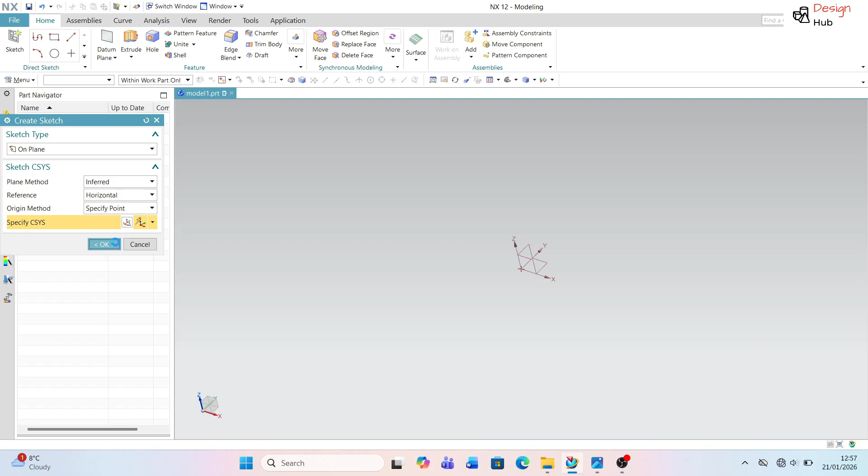So let's start. First of all, select the new drawing, select the sketch, select the top plane. We are going with the line command. Select the line length of 22.5 mm.

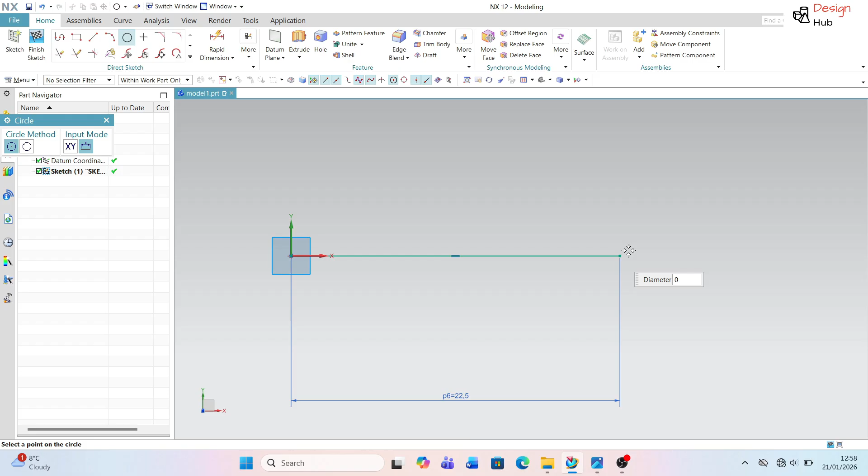The outer circle, the radius is 18 mm, means 36 diameter of circle, the both side.

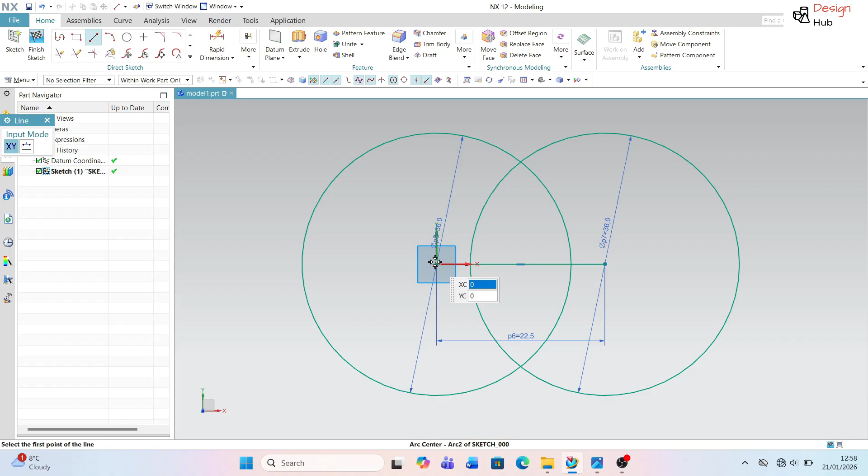Now going with the line command for the reference, the both side and bottom side as well.

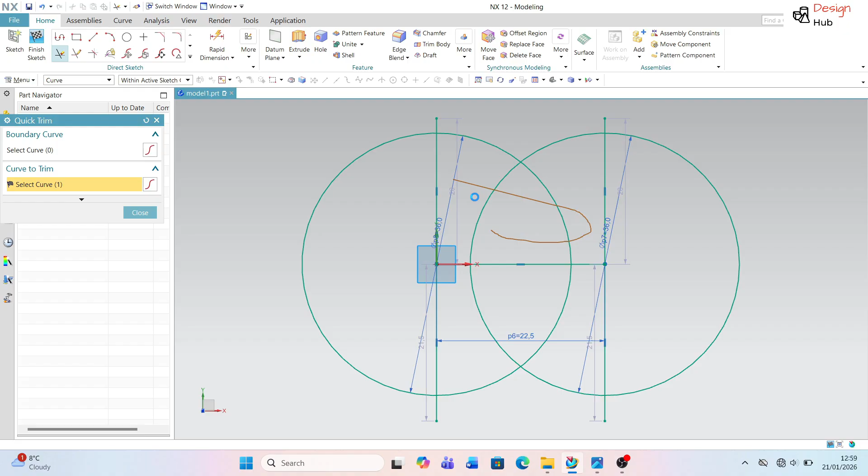Now we are going to trim the unwanted circle and the line.

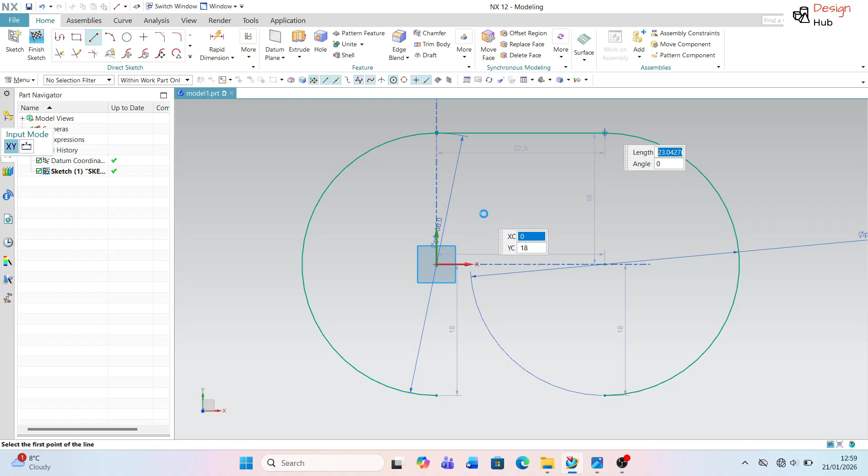Now select the line command and join the two half circle, and our outer sketch of part is ready.

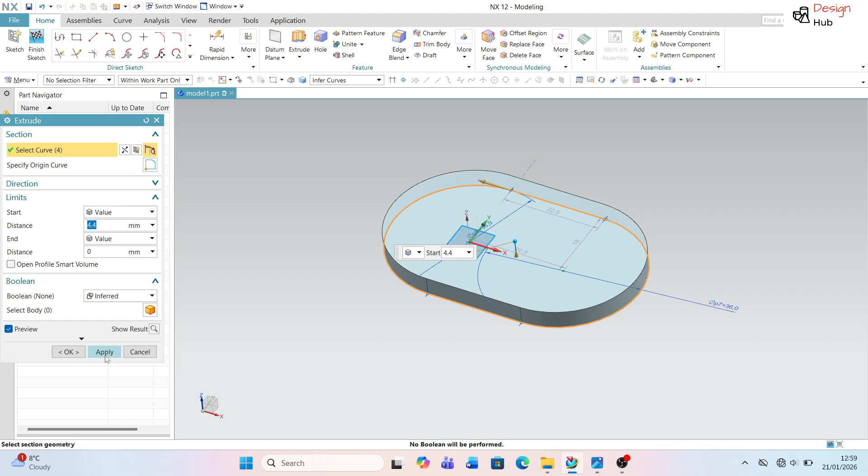Now we are going to extrude this sketch with the distance of 4.4 mm, and you can see the result.

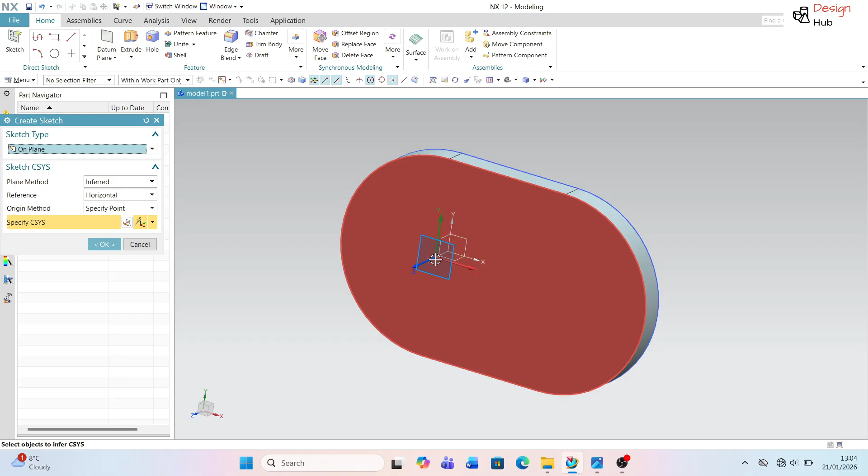Now on the center there is another part, so we are going with the plane command.

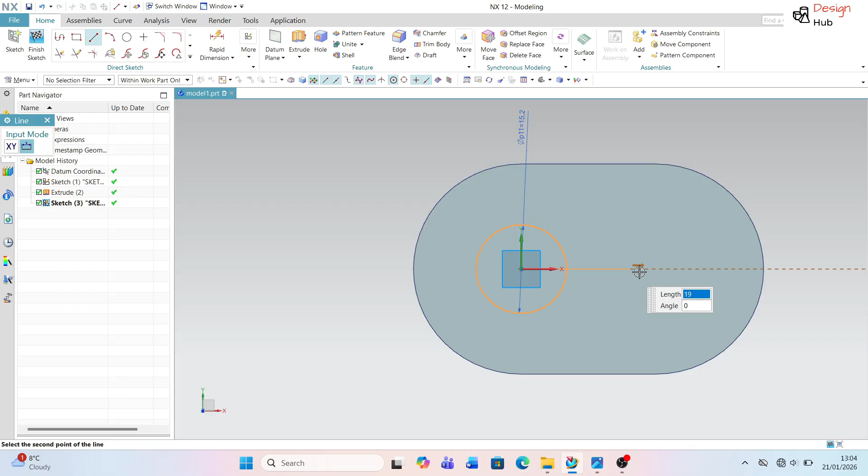Going with circle with the diameter of 7.6 radius, so means 15.2 mm. So both side the circle diameter is 15.2.

Again the same process. Select the circle and inside half circle is radius 5, means 10 mm diameter.

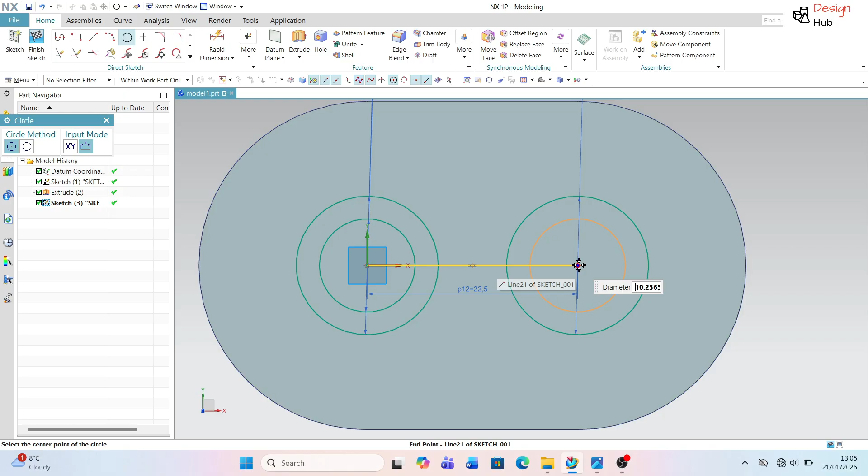Now going with the line command for the reference line, upside and bottom side as well, and the both side. Now going to trim command and cut the unwanted line.

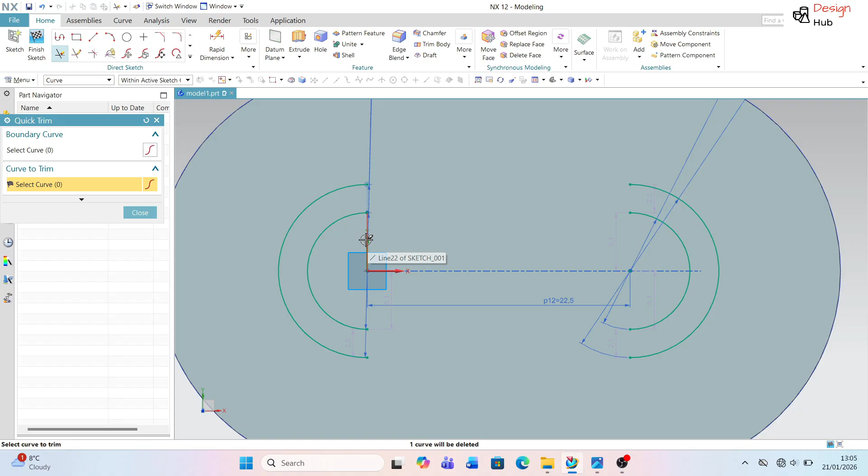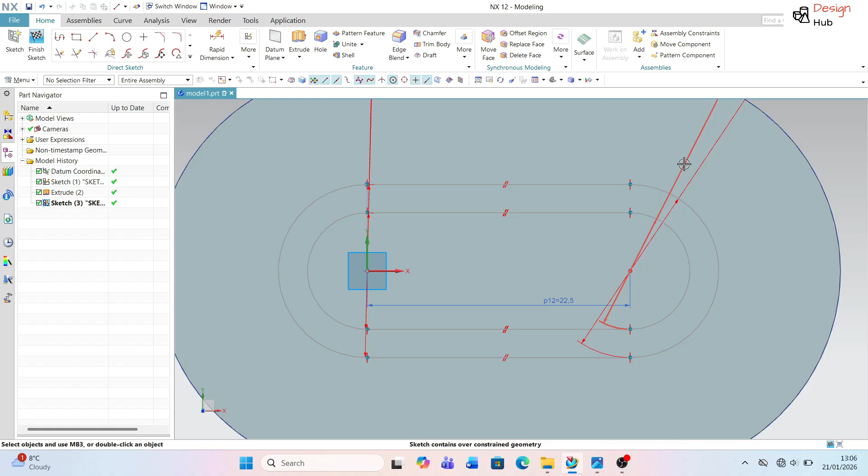Here's a trim ready, so now we are going to line command and connect all the points, delete the relationship. Our sketch is ready.

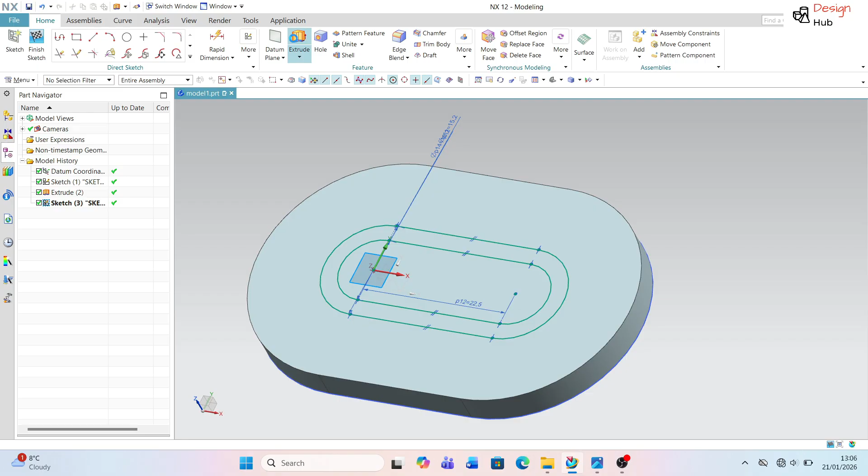So now we are going to extrude, but before we are going to calculate. The total height is 16 mm minus 4.4, so the extrude height is 11.6 mm. Select the extrude and the distance is 11.6 mm.

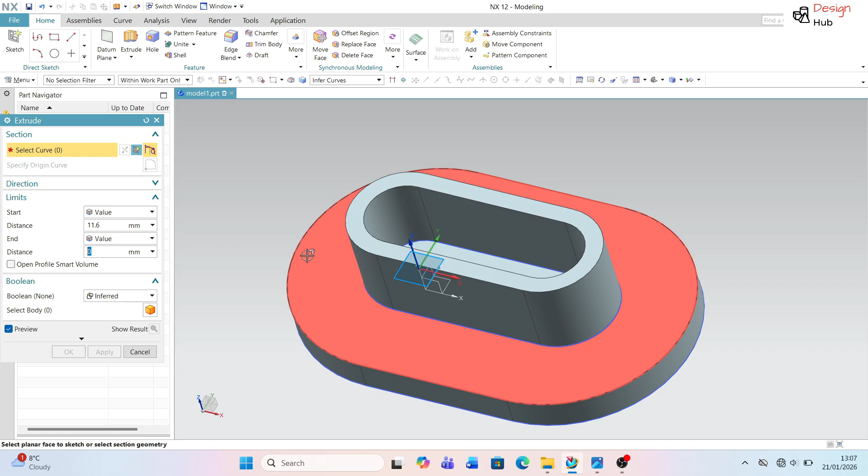And apply. You can see the result is ready. Now there is some center part also need to hide.

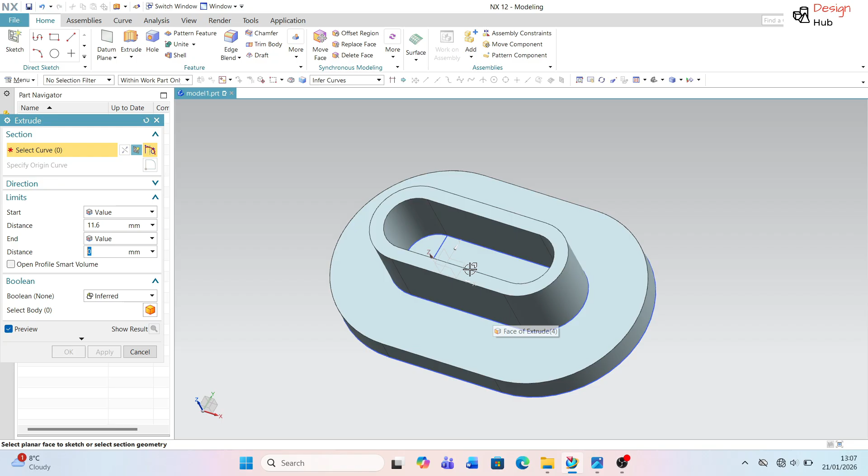So first of all, we are going to calculate some distance, and now going with the sketch command, select the plane, and first of all going with the circle command with the diameter of 10 mm, the both side of same diameter.

Now draw some line for the reference, the vertical line like both side of point, top side and bottom side. Now trim the unwanted line of the inner part of the circle.

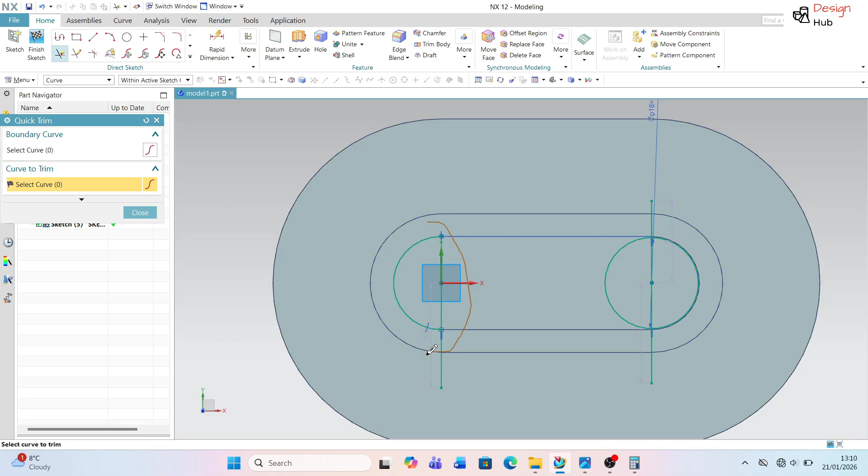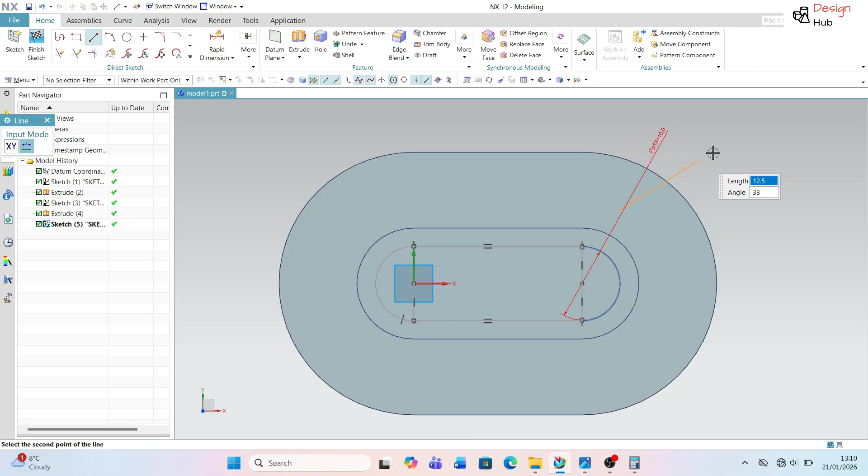Now join the 2 points of circle with the help of line command. Delete the relationship of line with the circle. Now inside part of sketch is ready.

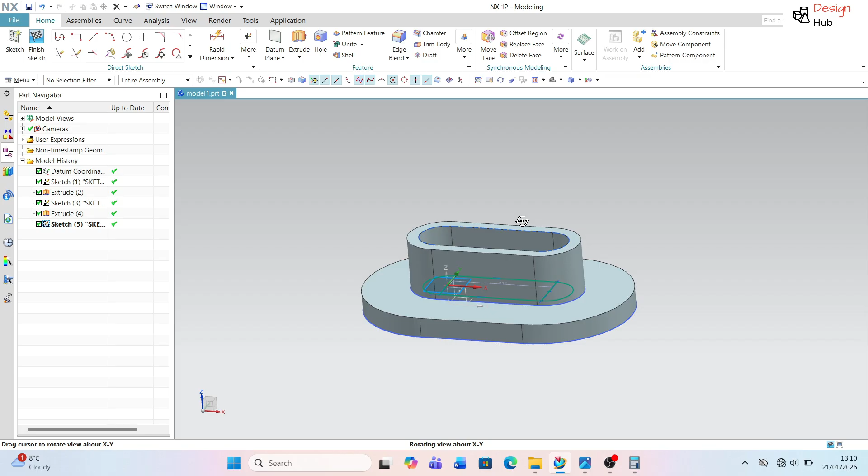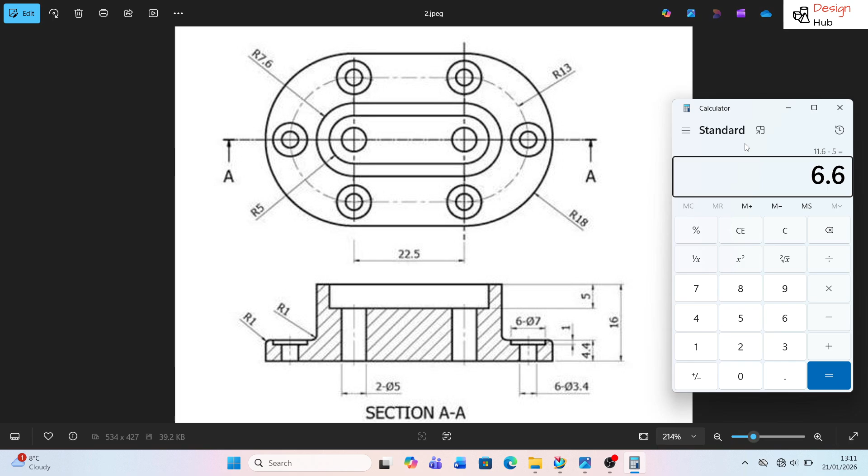Now going to extrude, but before going to calculate the distance. So total is 16 mm and we use 4.4 mm for thickness minus 5 mm from the top side. So now 6.6 mm we need to extrude.

You can see our inside extrude is ready.

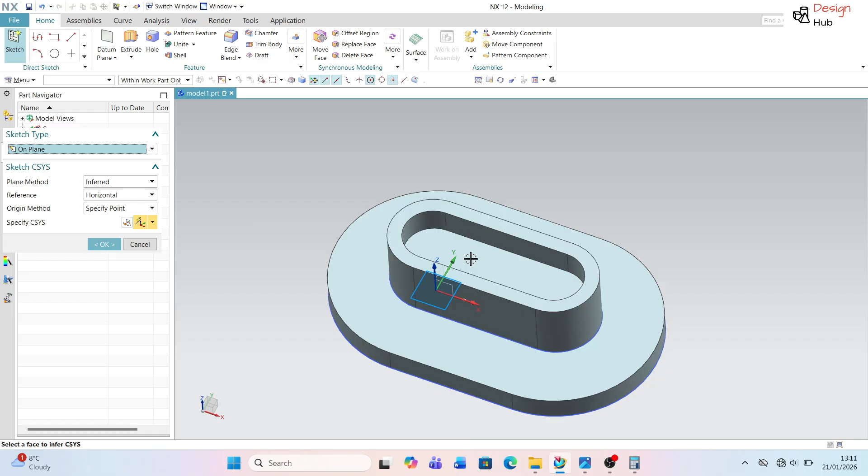Now you can see the drawing, there's 2 holes with the diameter of 5 mm. So going to sketch plane, going the circle command, diameter of 5 mm, the both side.

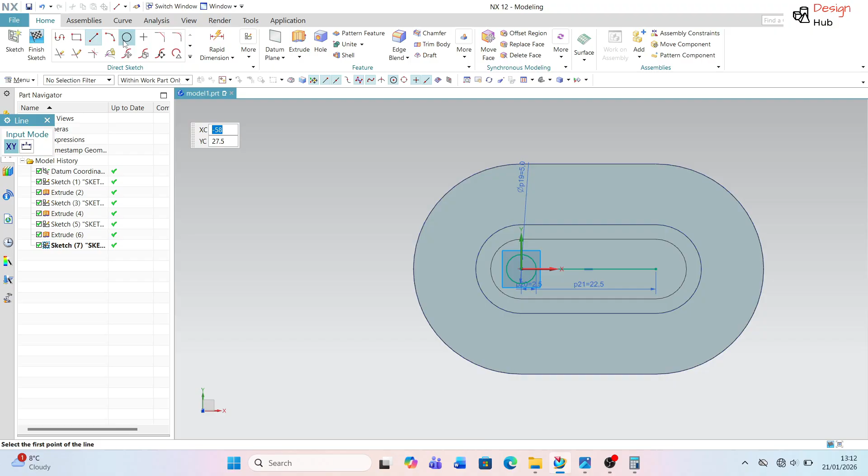The center to center distance are same 22.5 mm. So our 2 holes are ready. So we are going to trim the unwanted line.

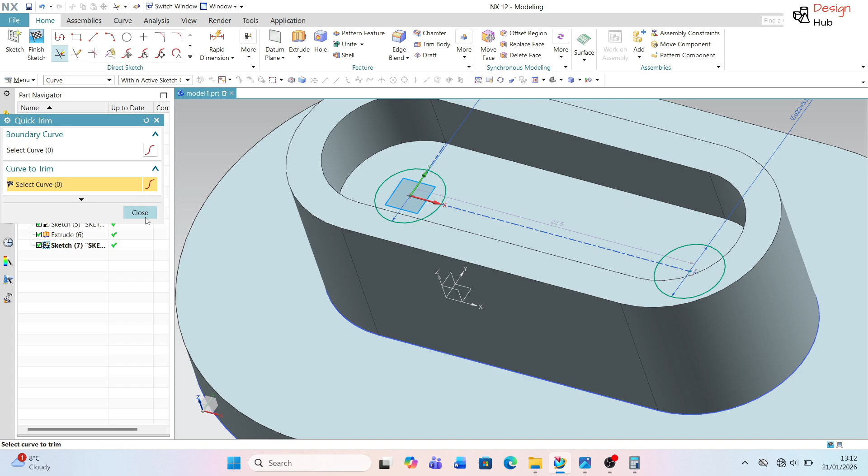Now we are going to subtract the sketch using the extrude command. So you can see our hole is ready.

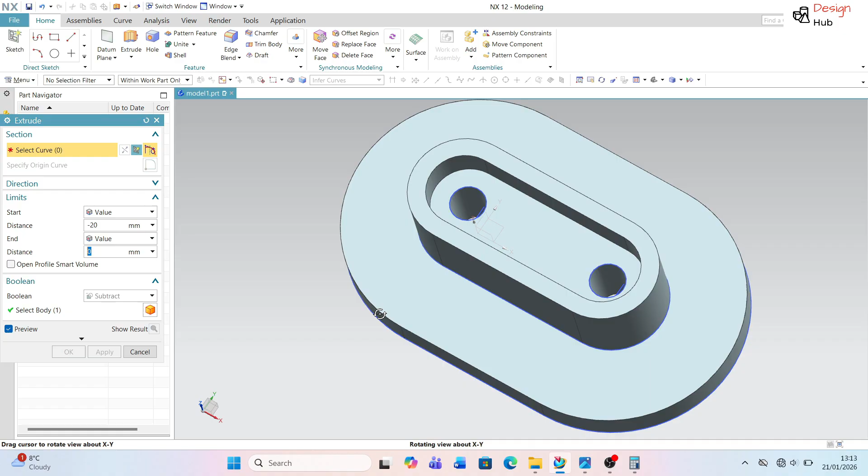Now you can see there is a 6 hole on the face with the diameter of 3.4 mm as per drawing, and the center point.

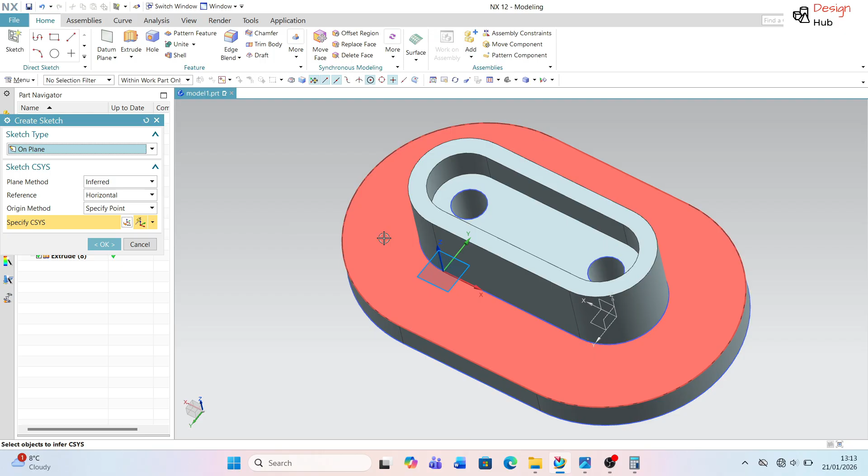So first of all we are going to circle command. The diameter of 26, draw the line the both side, top and bottom. Now trim the unwanted line.

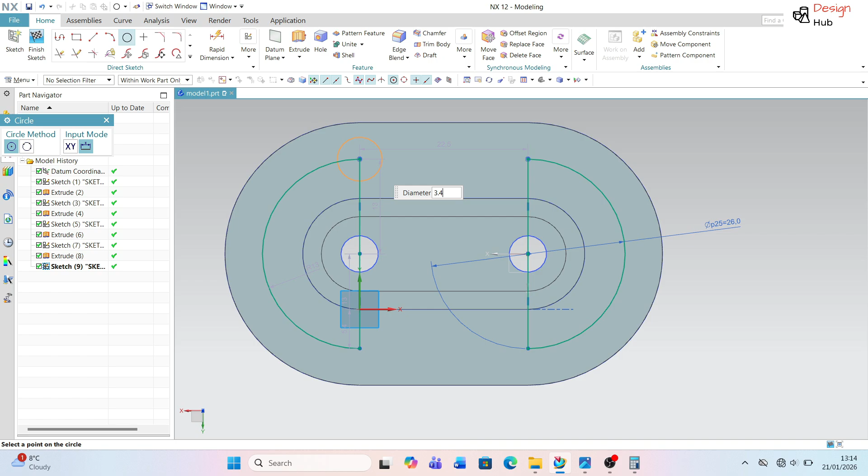Now going to circle command, the hole diameter is 3.4 mm. So you can see our 6 hole sketch is ready. So now trim the unwanted line.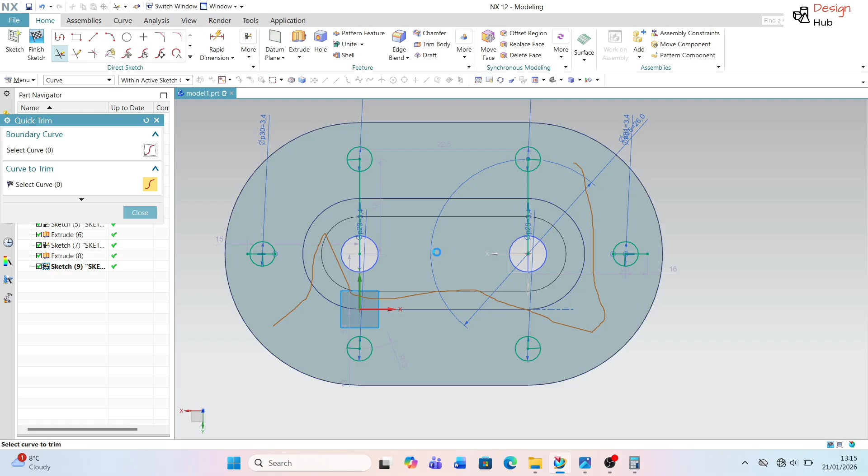Now subtract the sketch, and you can see our holes are ready.

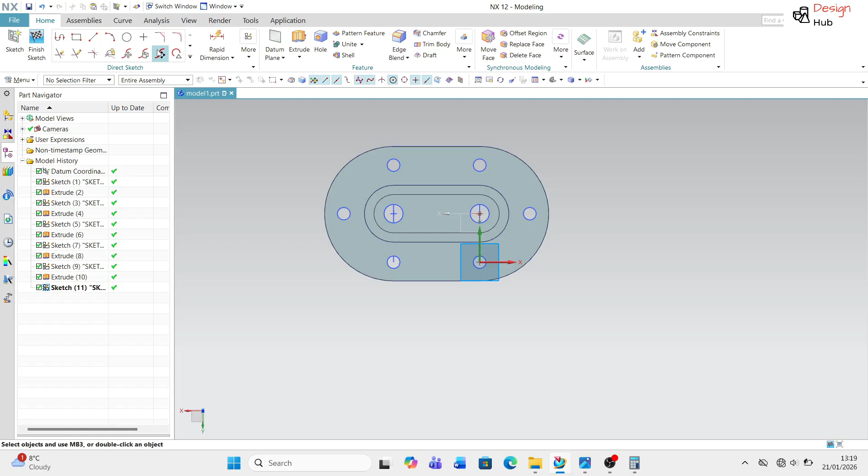Now again the 6 hole with diameter of 7 mm, with depth of 1 mm, is a counter hole. So we are going to same process. The 6 hole we are going to do with the diameter of 7 mm.

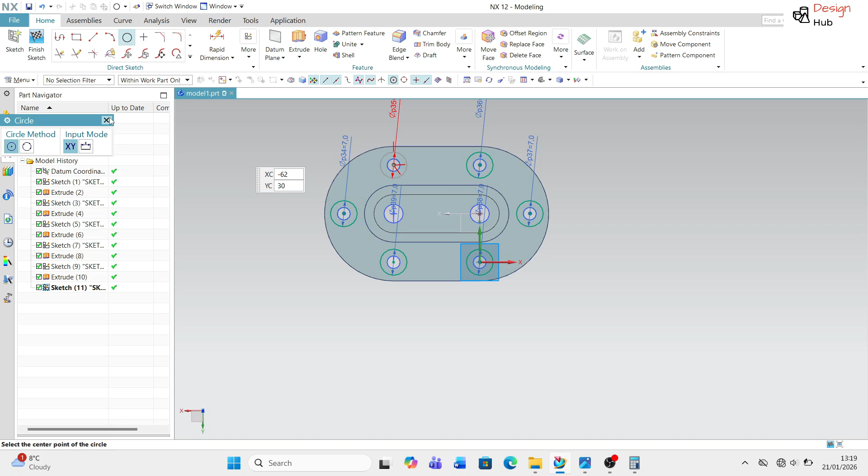Now you can see the depth is 1 mm. So we are going to extrude, subtract the distance is 1 mm. Apply. You can see our counter hole is ready.

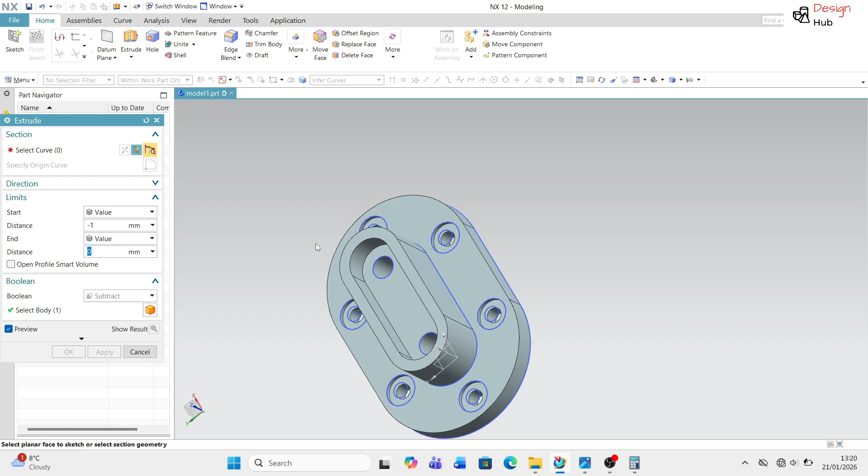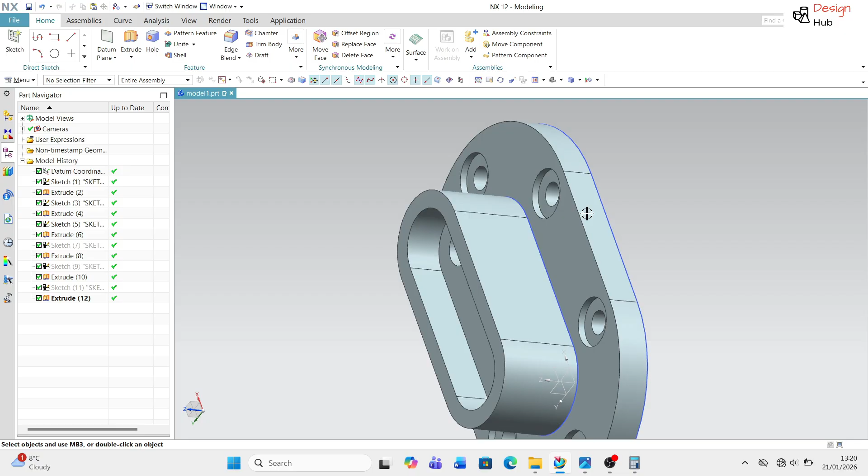Now hide the sketch line for the better appearance. All the sketch lines we are going to hide.

You can see our 90% job is ready. Now you can see our blend on the edge of the job.

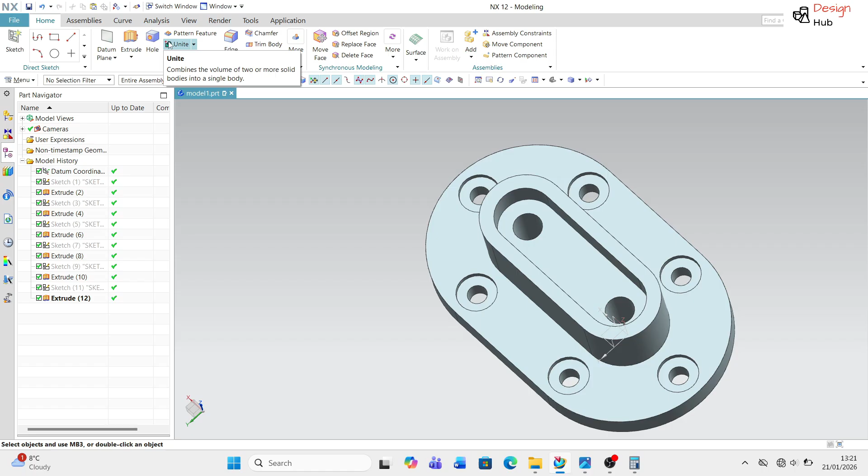So we are going to choose the edge blend, select the edge, the radius is 0.25. Now we are going to move, so we are going to radius with 1 mm.

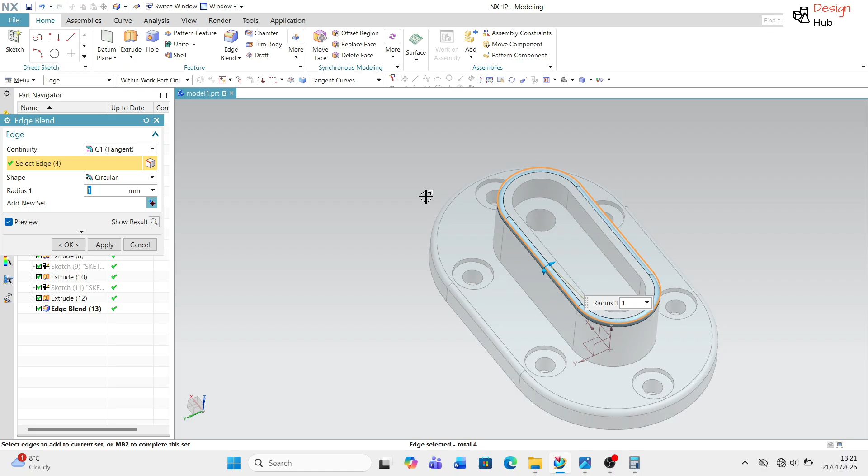Again choose the edge blend. Select the edge, radius is 1 mm. So same, doing the inside of edge for the blend.

So you can see our job is completely ready.